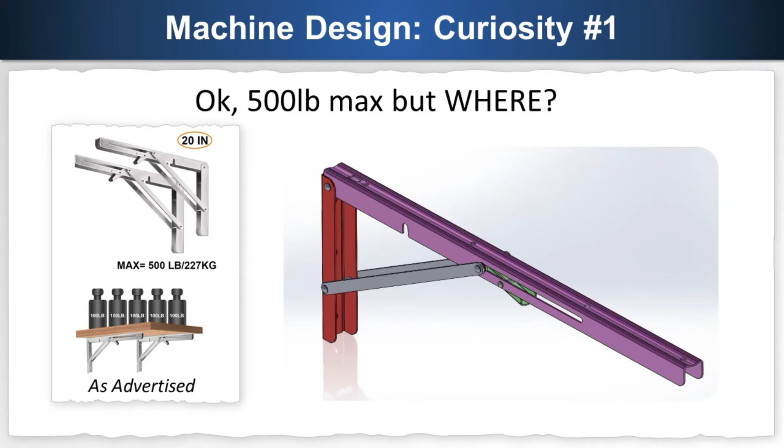Today in the Teardown channel, we are going to be analyzing a folding shelf bracket. Here are a couple of things to keep an eye out for. A loading of 500 pounds max, but where? How do I measure the torsional stiffness of the whole thing easily? What is the buckling force of the links such that they bow outwards?

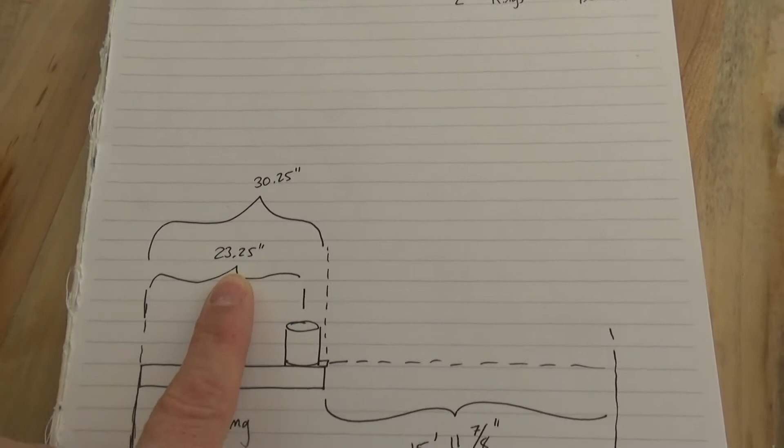There's a line here that's scribed to where we're going to load the center of the buckets. This tape is going to allow me to put another bucket on each side such that they're centered on the line. That is 23¼ inches away from the back over here. And then to the tip of the table is 30¼ inches.

With the laser mounted here, we're going to pan over and mark the 0, 0 location. So right now, it's going to go right there, and that is origin. And what we expect to happen is, as we put more weight, this point is going to go down due to Abbe error.

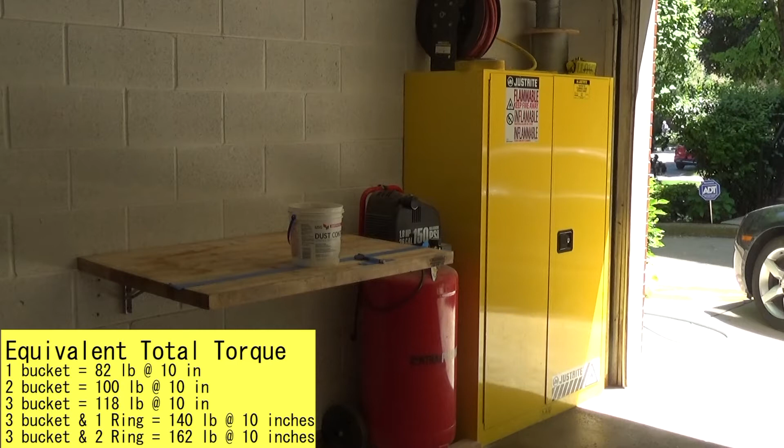Let's start. Data point 1. First, we're going to put one bucket right on the center of that location, and mark the point. 1 bucket. Now we're going to move on to 2 buckets. Make sure that the buckets don't apply a torsional load on the table. We're going to put them roughly at the center each.

Hold up. Am I missing something? Or did I hit the laser? I put the laser to the side, so we're going to have to start over again. Oh, no, it's there. It's aligned. So the laser just moved when the bucket's there. As long as it stays vertical, there's one way to determine: if I move this back out, does it go back to the original point? Yes, it does. So just be careful, don't move your sensor. It's a little bit off, about 1 millimeter to the side.

You'll see. So with 2 buckets, we're going to go here. Two buckets. Now we're going to do 3 buckets. Let's try to make sure not to touch the laser again. 1, 2. Third one. Come on. 3. So now we should have 3 buckets here.

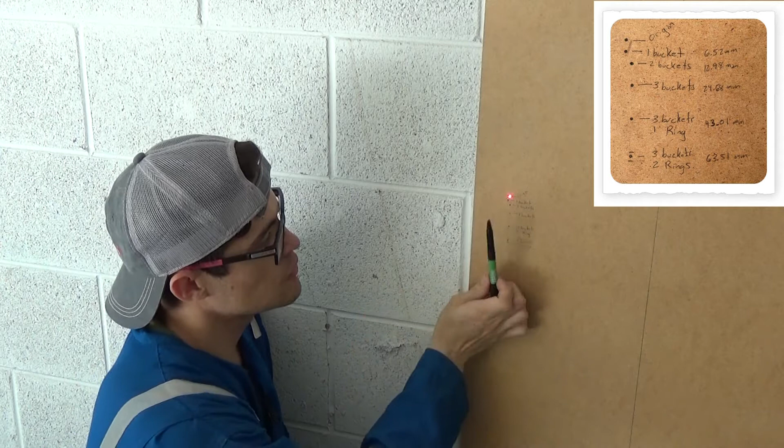Alright everyone, so we actually have done our loading, our experiment. The unit actually went back very close to the point of origin. There was a slight lateral shift, basically 1-2 millimeters sideways when we went from 1 bucket to 2 buckets, and it actually moved the laser a little bit, but everything looks like it's aligning well.

So what I've written here is the vertical displacement as we added 1 bucket, 2 buckets, 3 buckets, and then the rings as well. So as we loaded, that angle started to deflect.

And this, based on the distance, now we actually have what the Abbe error will be. And from that, we're going to try to back calculate what the actual parameters are for this configuration. Eventually, what we're going to try to get to is trying to reverse engineer the conditions that they are actually claiming this mechanism is rated for 500 pounds.

So we're going to weigh everything out, do the analysis, and then we're going to see how close it is, or under these conditions, how it's going to work. This is all about just having fun, reverse engineering in your garage, okay? So we're going to keep going.

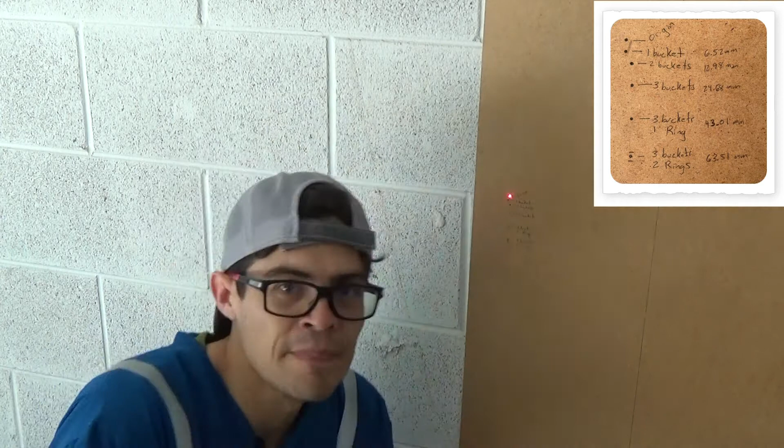So this is underneath right now. The table is completely unloaded. What I'm going to do is show you what the deflection is slowly. This is 1 bucket.

Now we're going to add slowly the 2 rings simultaneously, so it's going to be 1 bucket and 2 rings. Just look at the deflection that's taking place in these links.

And now I'm going to add the 2 additional buckets, so it's going to be 3 buckets and two rings simultaneously.

So let's get the analysis going. This is the total length that we have from the pivot location all the way down to the projection plane, the distance to our applied load, and our applied load in newtons. So using those values, I calculate a total torque, which is based from the load and from the static load of the table, the thing that doesn't change at all.

And then I use the displacement here to calculate what the rotation angle is about the pivot location. It calculates in radians because it's the arctangent of delta P over LT. And then I convert it into degree units.

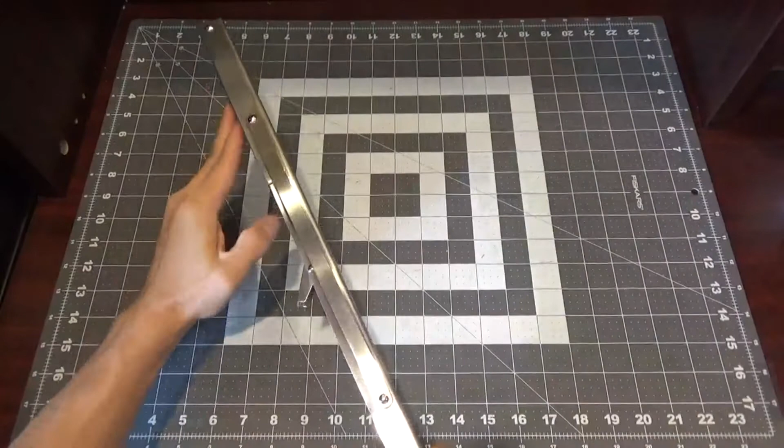Let's get started. Folding shelf, let's do the analysis, okay? This is so big, let's convert it into that little cute thing. And actually I like playing with Legos, and that's the only reason why I did it.

Simple. Alright, before we start, we're gonna go barbaric. I'm gonna set up our working digital table. Ta-da! How do you like this for digital? In the age of technology, I go paper and pencil. Okay, actually it's going to be more like markers than anything else.

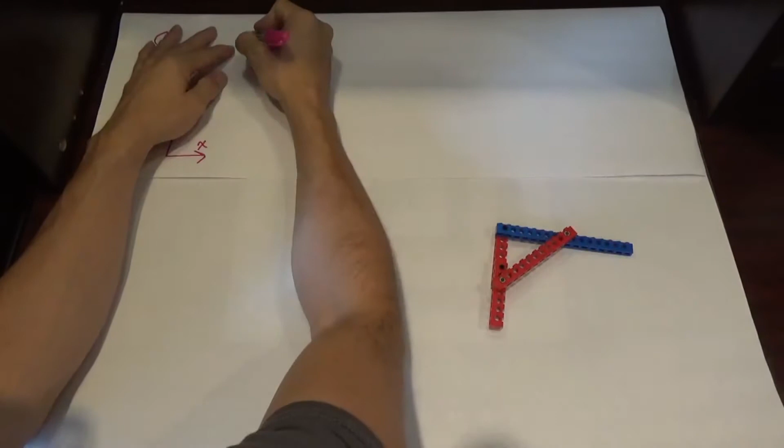Alright, on the serious note, one of the things we're going to try to do is help you set things up for any problem. So here's the method, and I put it on the little folding thing so we can do our problem here and keep our method in mind. Before you begin, you have to have a coordinate system. Do not go home or start a problem without a coordinate system, it just doesn't go well for you. Okay? And then the next thing we're going to do is label components. Okay?

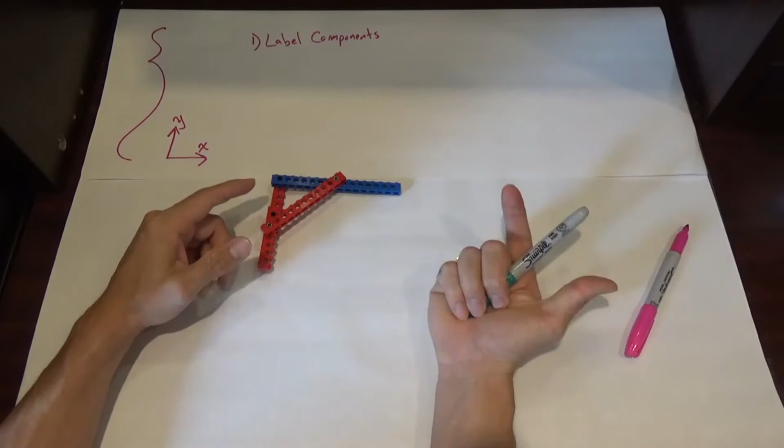I would love to just put everything here already, but I like playing the game: show me the rule for the next one, show me how to do it, and then keep going. Don't just give me everything and go for it. If you want to know what it is, first we're going to label the components: this part, this part, go to the points, do the sum of the forces in X, sum of the forces in Y, the sum of the moments by establishing equilibrium. But let's just go step by step instead.

Label components. Hey look, it does a really good job being a little support member. So where's the printout? Here's the printout. Ta-da! So this is the model. We're going to call this a bar and support.

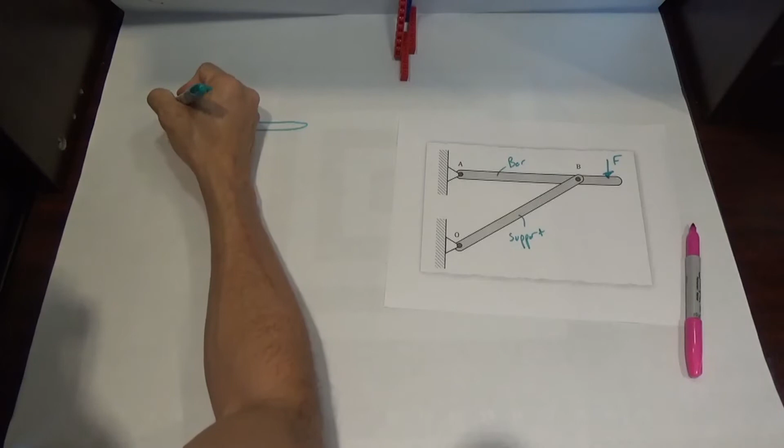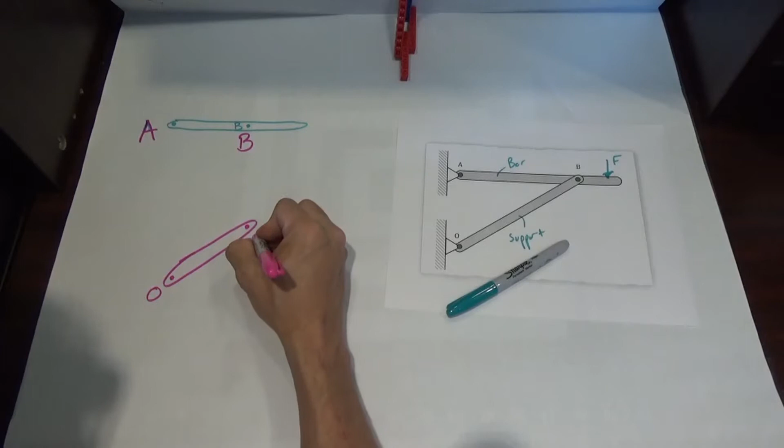Let's remember, there is a force somewhere along here. So let's start with the bar. The bar goes there, it has a point A, there's a point B. Let's use bigger letters: A and B. And then let's get this guy here, and this is O, and this is B. Okay, that's labeling components. Is it?

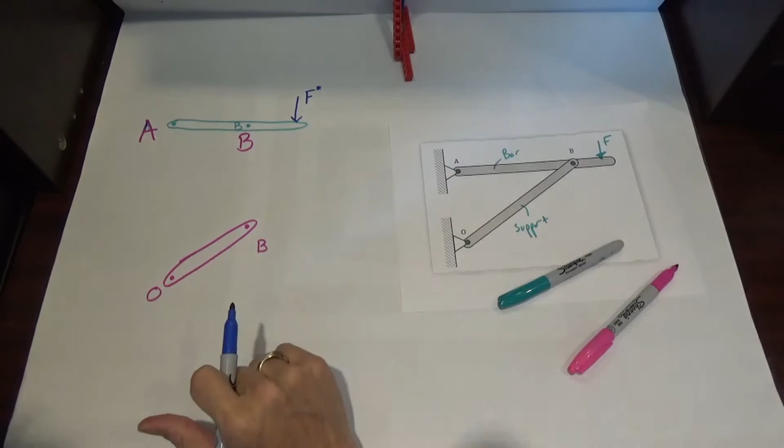Now let's put our forces in. So point two: forces. This is our applied forces as well as our reaction forces. So we're going to put a force F here, F star, and we're going to try to figure out how F star translates to a force on this support. So at point A, because that is a pin joint, we're going to have only force.

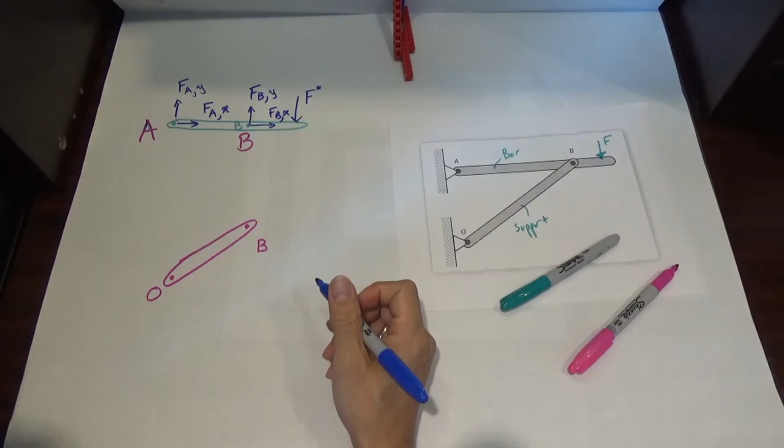Now here's a fun part. You can say, how did you pick the location of the forces? How do you know they're both in the positive X direction? Let's start with the coordinate, X, Y. How do I know that both of them are in the positive X direction? I don't know, this is actually just the method. The method will help you determine which direction is which from later on the math. Pick one, go with it, okay?

So let's go here. Because point B is joint there, it's equal and opposite, okay? So we're going to put another force here, equal and opposite: F, B, comma, X, equal and opposite, F, B, comma, Y. Now you can say, well, why are you putting it the other way at point O? Look, if it's new, I'm going to put it in as the positive direction, and then we're going to analyze them on their own. O, comma, X, F, O, comma, Y.

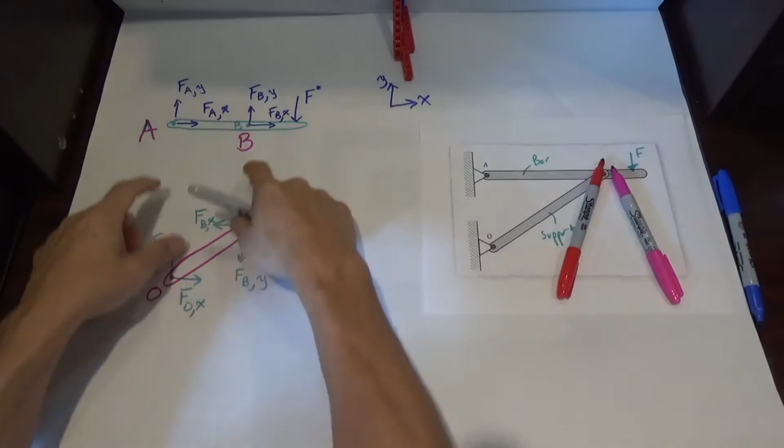Forces, applied force, great, next: sum of the forces in the X, sum of the forces in the Y, and the sum of the moments. So forces, now equilibrium.

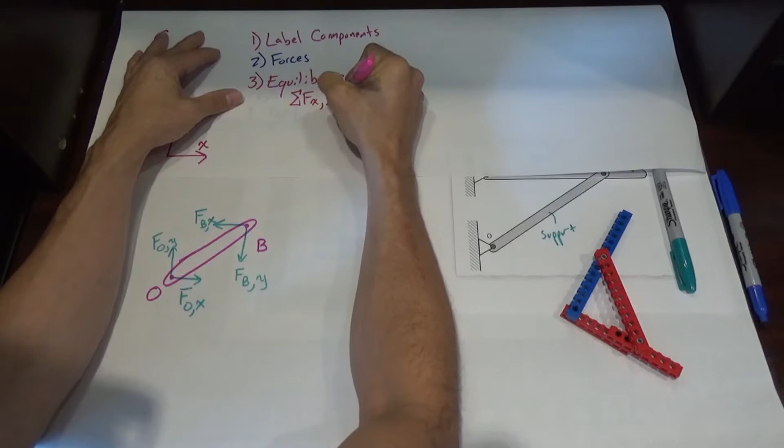And what does this mean? This means, if you see me humming or something, it's because I am actually listening to music while I do this. Why? Because that's the way that I usually work. I like music, and it helps me dance with the problem, to say the least.

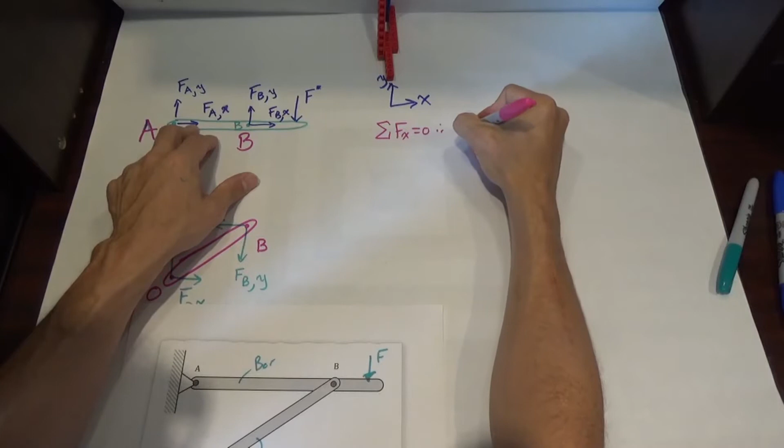So let's do this. How do I do this? Look, I have sum of the forces in the X. Let's do that: sum of the forces in the X for that equals 0. Therefore, F A comma X plus F B comma X must be equal to 0. What does that mean? F A comma X equals negative F B comma X, right? Done. When I get this, I box it.

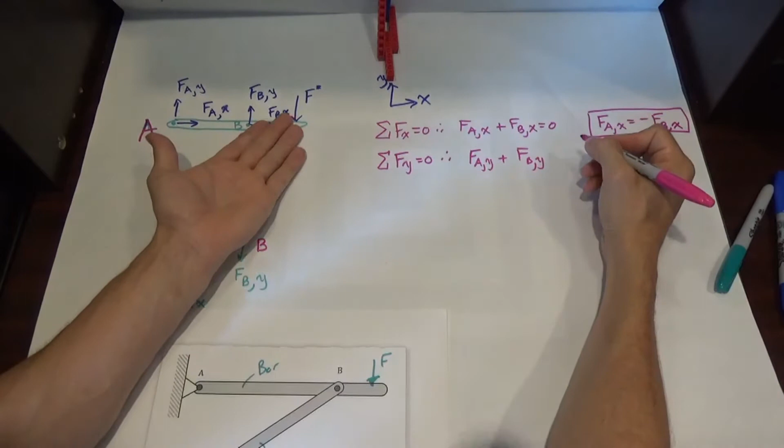Now let's go to the sum of the forces in the Y equals 0, because it's all equilibrium. Otherwise it would be F equals ma, because it's moving. In this case it's not. Look, we have three forces in the Y for this one: force A in the Y plus force B in the Y. Why did I put that F in the minus? I could have put it in the positive, doesn't matter, I can just put minus F star.

Equals 0. What do I really want to find out? In this case, eventually I want to just get a system of equations so I can find force B, and this force B is going to get back up here. So let's put F of A, Y. F of A comma Y has to be equal to, that's this force, F star minus F B comma Y. Okay, I can dance with that. Why am I doing all of this in letters versus numbers? Because this is going to help me do it for any system eventually.

All right, let's do it for another problem here. Eventually we'll do the sum of the moments. Let's put you up there. Yeah, let's just do it for here. Sum of the...

Forces in the x for you. What is that gonna equal? Zero. And in the x, we have this candidate here, minus FB comma x. Why? Because it's equal and opposite of that one, but that means this is in this direction. That makes it equal zero. So F0 comma x equals FB comma x.

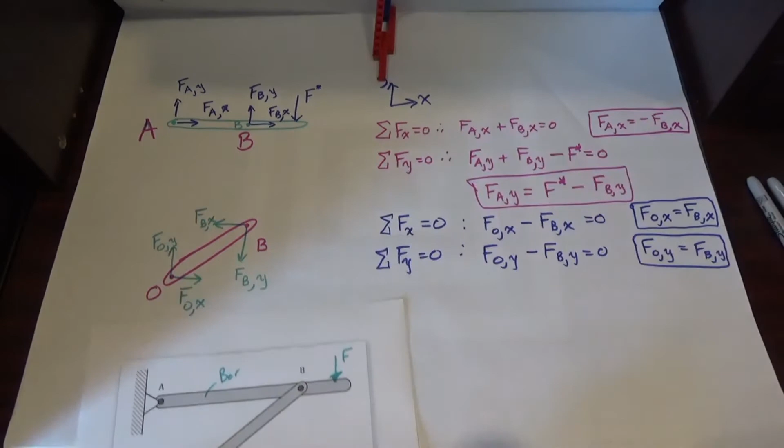Okay, so F0 on the y minus FB comma y. And I did this throughout college, I always used to put my finger, oh, you're next, oh, you're next. Okay, so what does this mean? F0 comma y equals FB comma y. By the way, this is one of the most useful pieces of advice that I will give you: keep your work really clean. If you don't keep your work clean, it is going to be a headache for you in the long term.

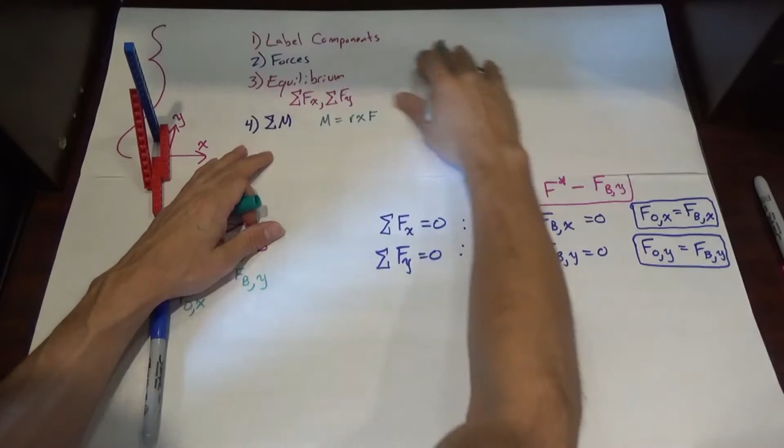Okay, we have equilibrium. Now we're going to go sum of your moments, which is part of equilibrium, but I wanted to put it into its own accord. So what is a moment? Moment is defined as R cross F. And as soon as I start writing this, it's going to be an abstract Vulcan language... let's just go and start, this is a mini lesson on moments.

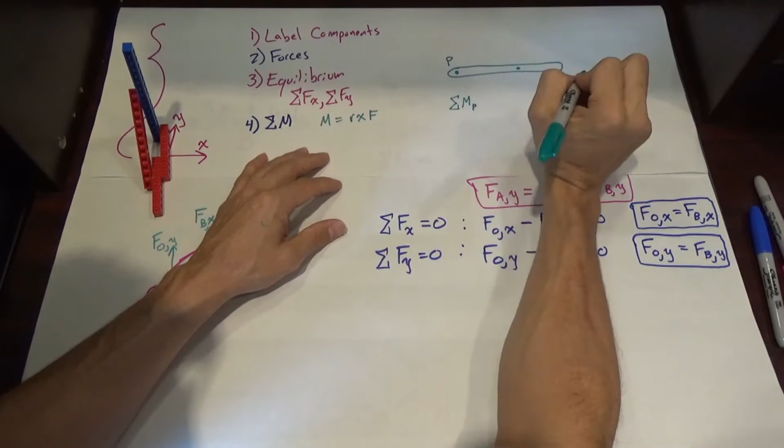And let's make this point P. If I take the sum of the moments for P, right? What is a moment? A moment, it needs a lever arm. Okay, so we're gonna call that L. And then a force. What's the force? That force could be, if it's that way, right? That's a force. So what's the moment?

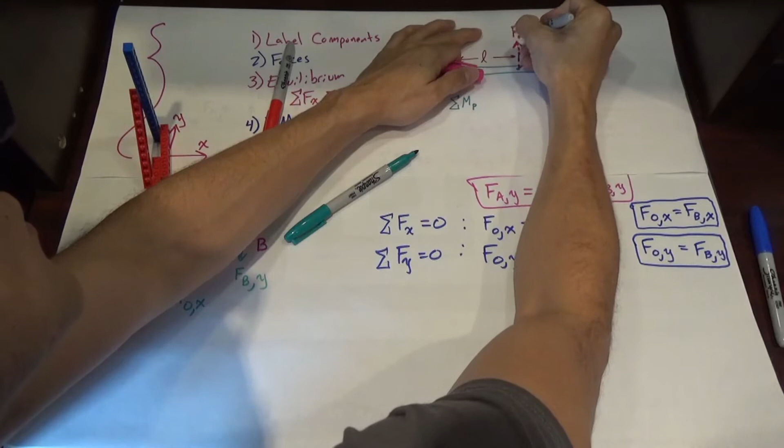This little cross product means give me the 90-degree component of it. So if it's this pink one, this force, that means 90 degrees is this one. So it's whatever this component that's 90 degrees, orthogonal. Okay? So whatever it is, then you locate it by the angle, and then that's what it goes. That's all that cross product goes into.

So in this case, the way that I've done it is I put all my forces in the x and in the y direction. Therefore, we'll figure out the angle stuff later. Let's start with the sum of the moments here. You see how F of B in the x direction is aligned, and F of BY in the y direction is 90 degrees. That saves us the hassle of the angle. And it's not really a hassle, it's actually really easy. So let's look at that one.

If I go and I pick the sum of the moments about A, then I have an entire system of BY and F causes a moment. If I go the sum of the moments about B, then that means FAY and F star causes a moment. So you just have to pick one. So I'm going to go the sum...

Of my moments. And then this is what we call the bar, right, of A has to be equal to 0. What does that mean? Okay, so that means I'm at this point, and because there's no lever arm, you go away and you go away. We have none of that.

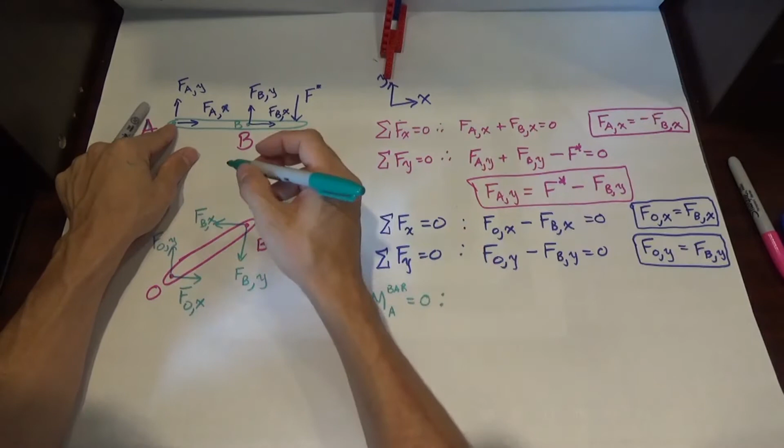Now, if I go here, because F of BY, there is no orthogonal component, that means, oh no, F of BX, sorry, there's no orthogonal component, that means that goes away. And now I need the length from here to here, LB, and then I need the length from there to there, and we're going to call that L star. I don't know if you can see that. Great, so length...

Dun, dun, dun, dun. That means we have something here, and now let's do the same thing, and we'll probably do it in a different color just to vary it up.

By the way, this reminds me of a story that I like using colors. Sometimes it's good, sometimes it's bad. I failed my qualifiers exam the first time because I got too enamored using colors and not enough focusing on the content. So what does that mean as a lesson? Hey, guess what? Focus on getting the job done right before you just start going and having fun. So let's get to this.

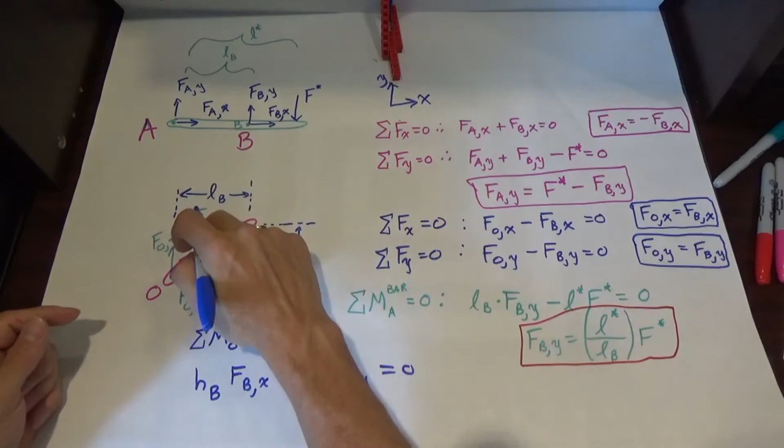So what does this mean? Now we're going to get the other one. Okay, I have a bunch of equations now, but check this out. Now I have an FBY, and then if I have this FBY, that means I have this FBX. I'm going to start getting them all into FBYs, and then get this out, and then, hey, this I can relate to that, and start breaking everything apart. Eventually, what I want to know is the forces FBX and FBY, or FOY and FOX. Why? Because this is going to give me the amount of compression or extension, right? In this case, I know it's definitely going to be compression of the support component that's going to cause it to buckle and distort.

FBX, F B comma X, that's going to equal to LB over HB. Great. Right? You move that to the other side, and this is going to be FB comma Y. Ta-da! Great. Now we have a challenge. And here's the challenge. I've run out of paper.

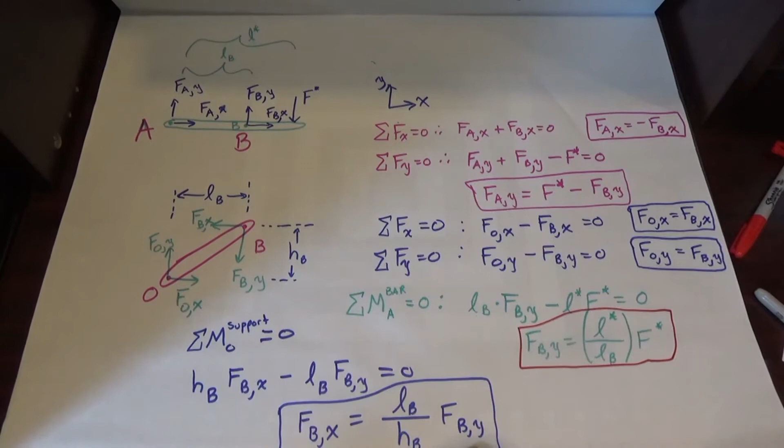Alright, so system of equations. I have 1, 2, 3, 4, 5, 6. And solve it. So what are we actually looking for? We're looking for this compression. If we're looking at this, I need to know FB of Y and FB of X. Hey, FB of Y is a function here, but I know that, and then that gives me in terms of L star and F star, and a known length. So this goes in here, and I can actually solve it based on these two. Now, why did I do the sum of the forces in the X and the sum of the forces in the Y? Because if I want to do the reaction forces here, which eventually you do, especially for more complex problems, you just get used to the method. Sum of the forces in the X, sum of the forces in the Y, equilibrium, which is there, sum of the moments, and then you'll get all the information that you need. If you want to do cheat sheets, or like if you're going on doing your qualifier exam, fine, you can jump up to here, but this comes only with experience, okay?

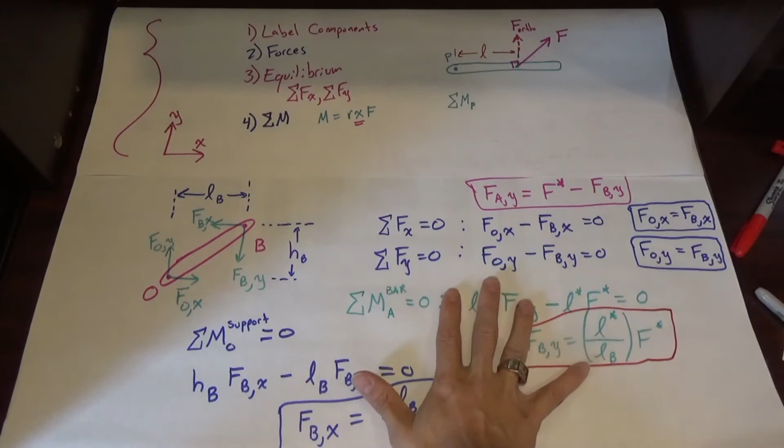And what I'm going to do is clean the board and go to the next one. So there's the 6 equations on top, and we're just going to do this section here. And I gave myself that spot up there just in case.

So if F of B in the Y equals L star, LB times F star, and then that means that goes in there, so F of B in the X has to be LB, HB, times L star over LB. Right, you're seeing why I put it here. LB HB times FBY, but FBY is here, so it's L star over LB times F star. Check this out. You go away, you go away. And now we're left with F, B, comma, X, equals nothing more than L star over HB times F star. Woohoo! What does this mean?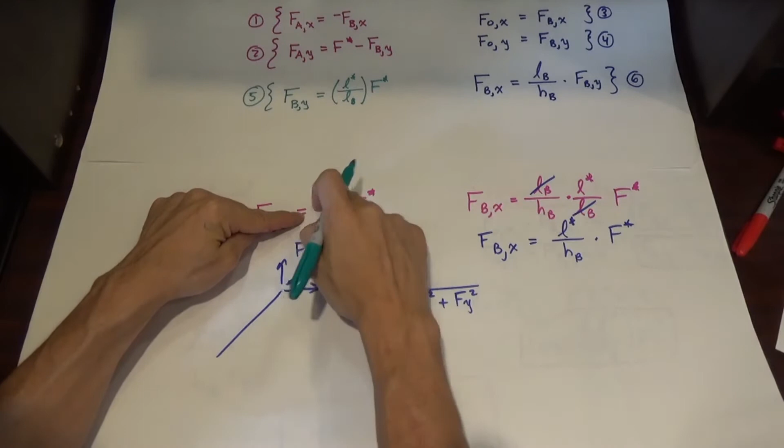So that means this is going to be F, and remember, this is the support, is going to be equal to... I'm going to move a little bit quickly on the math and bypass, I'm assuming you can do this too. It's going to be F star L star, because it's common to both of them, times the square root of 1 over LB squared plus 1 over HB squared, right?

Because if I put this inside and multiply, that means F star L squared, that's all there, and this is F star L squared, and that means that's all there. Wonderful. And this is what we're going to put into.

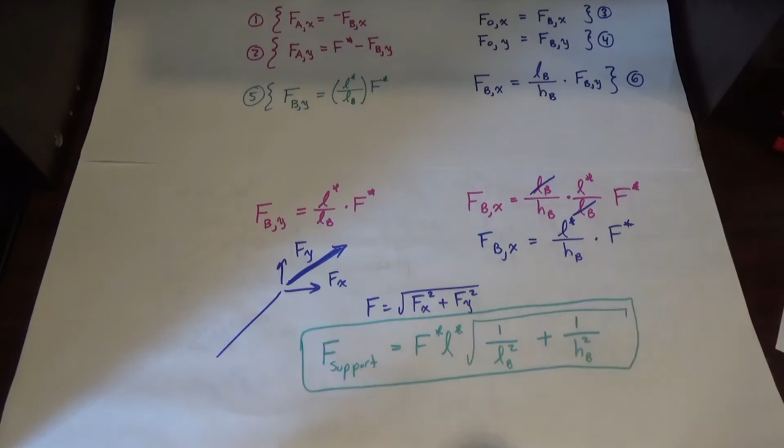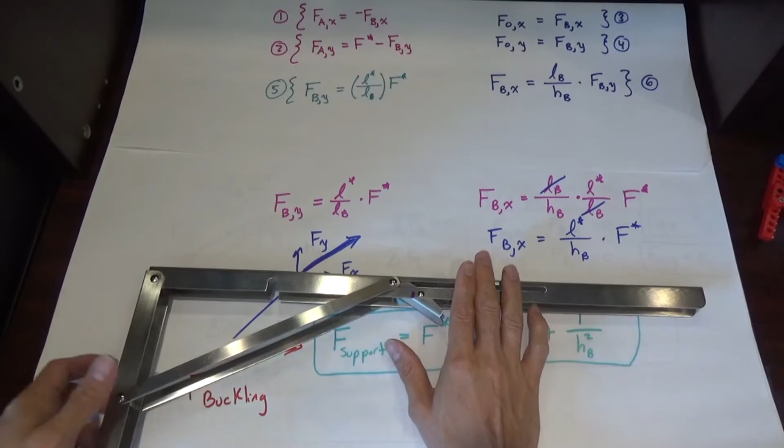Now, where is that going? That's going to go for Euler buckling. This force cannot exceed F buckling. So we're going to transfer this support force into a buckling force and see what is causing this component to essentially buckle outwards. In order to do that, we need to start a brand new sheet of paper and introduce everyone to Euler Buckling 101.

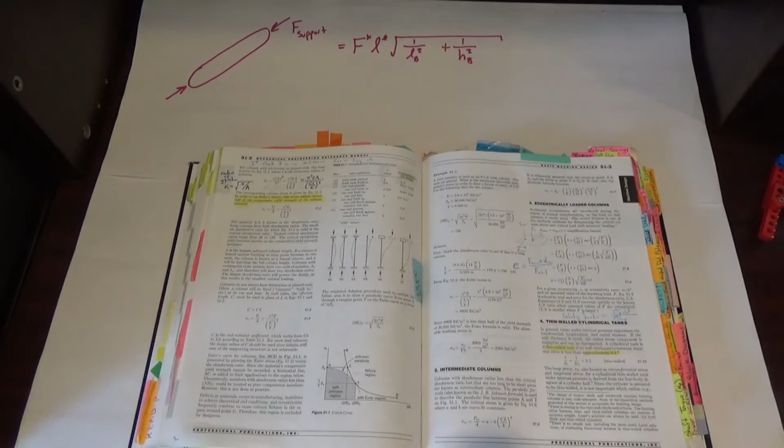Next slide. Ta-da! By the way, this is one of my favorite engineering reference guides. I use this for the PE exam in mechanical engineering. And let's get us here.

Euler Buckling 101. Here's an equation. These are different modes for the pin joints, for the built-in ends. So what I'm going to do is instead go over what the equations are and then actually just put it all in an Excel spreadsheet and look at the numbers.

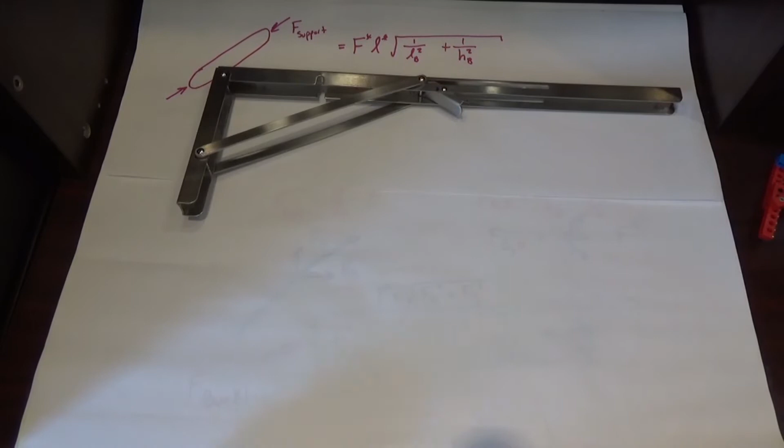Okay? So this unit is rated according to them. And let me zoom out, to 500 pounds, and that's both of them. So it was like, oh my gosh, when I did the test on it, I even put it, I was like, there is no way this can take 500 pounds. Absolutely no way. But my job as a geek was to say, Eddie, tell me the conditions in which this will take 500 pounds.

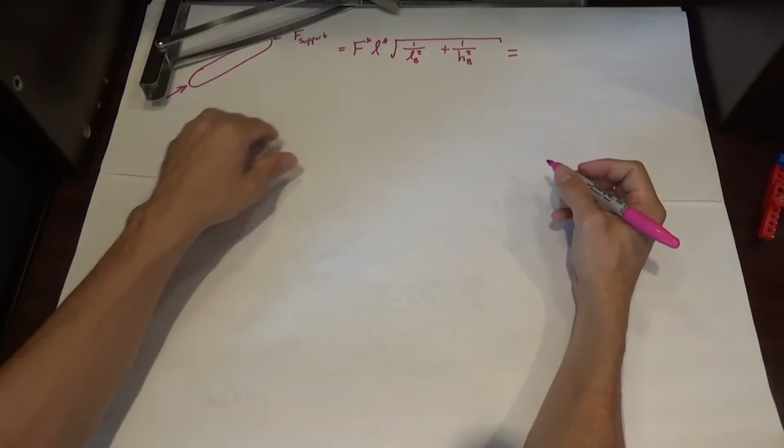So I started with this force of the support, right, and that's going and compressing, and I said, okay, let's do this. So if that's the support, what do I know from the other side? F support has to be equal to Euler buckling, and Euler buckling is just another equation.

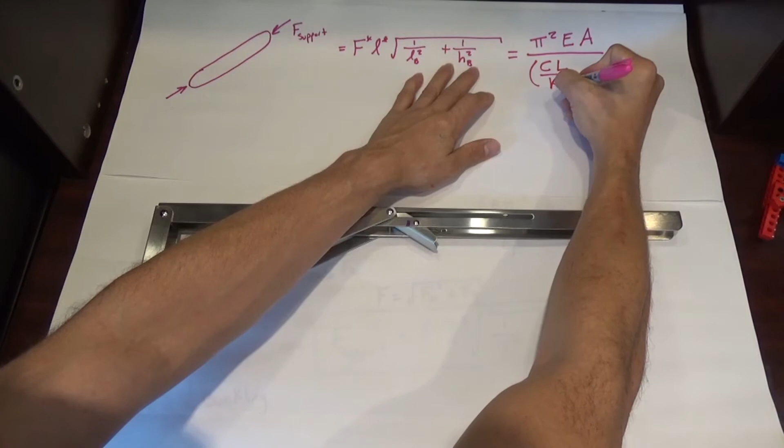E, which is part of the material properties, A, which is the cross-sectional area of that, and then it's divided by this funky looking number. And this funky looking number is CL divided by K gyration squared. So you can start going, oh my gosh, this is getting difficult. No, it's all just apples and oranges and just the same thing, just have to keep it.

So this K gyration is actually just a square root of I divided by A cross-sectional, and that's the same cross-sectional area here. And there's the Euler buckling, takes different forms. And this I equals just simply...

1/12 BH cubed. So, oh, that L here, this is L of length. So that L is the L of the length right here. The height is actually the thickness, so that height is the thickness of this component. That B is the width here. And anything else?

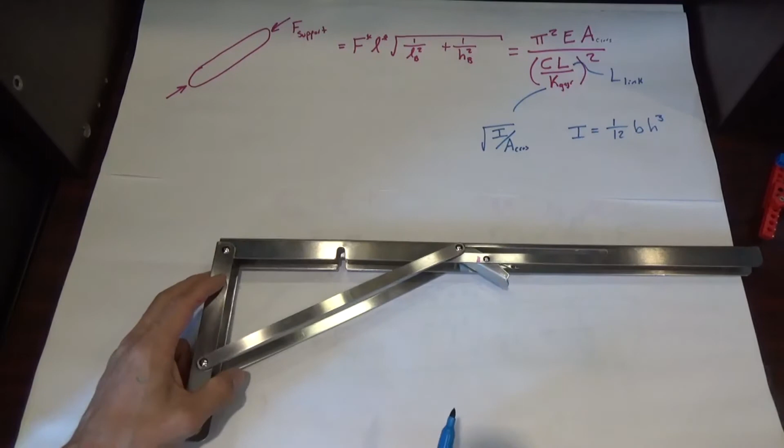No. Oh, that C factor. So that C factor comes in whether you are pin joints, which equals to C, let me go back to that reference, of 1, or...

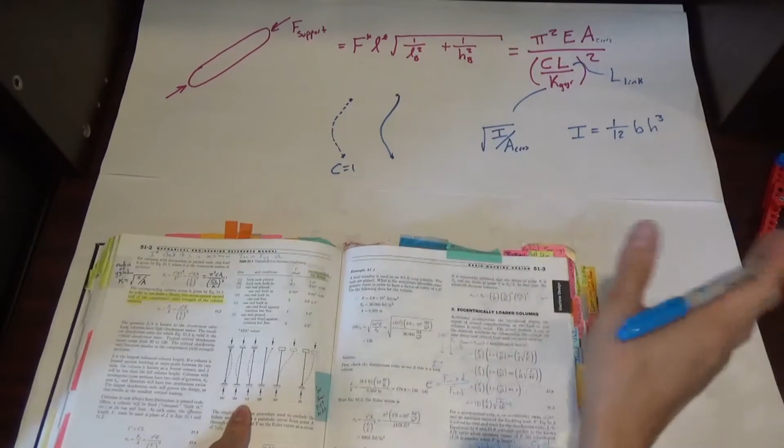Let me remove this guy out of the way. It's either 1 for this configuration, or in the other configuration where it's built in, and I actually believe that this is not built in for this system because of how it's actually deforming, and also because of the clearances, and this is C equals 0.65, but because that C goes in, there's going to be a factor of about 2.36, or actually we can round it up to 2.4.

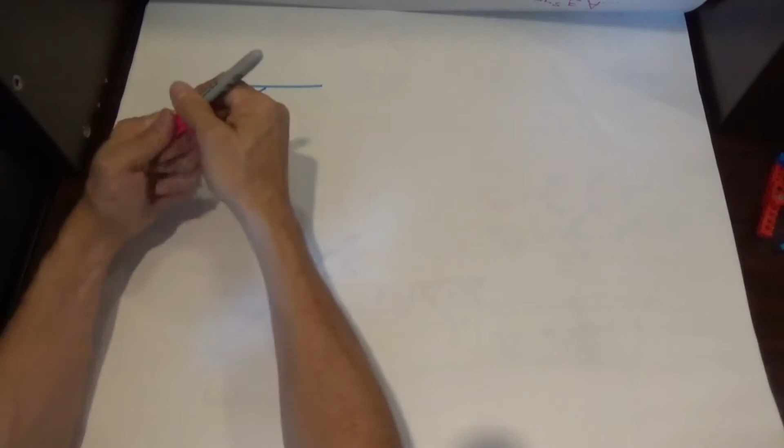Alright, so that's what the Euler buckling gives. So we can configure that equation to find this L. What is that L star? If you remember from the initial setup, L star was the location from the back where I apply my force, my critical force.

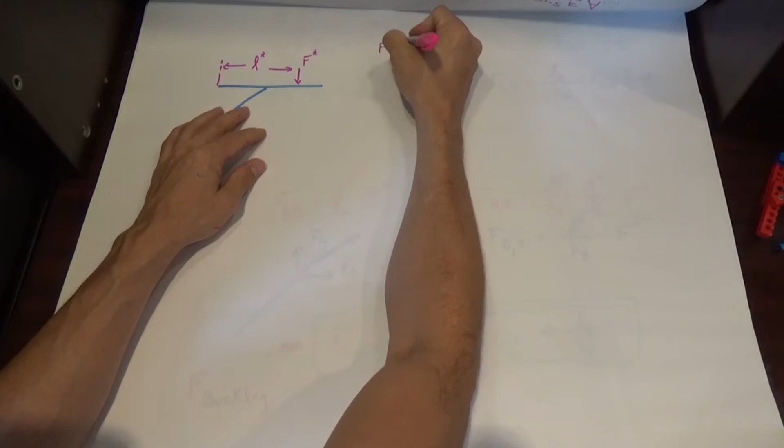To make sure everything is aligned, if I want to put that F star from the total load of the mechanism, that means I have 4 links total, 2 on each side, plus 2 units. This is where you get the math correct: divide that 500 pounds by 4, that's how much each link can take, and then do the analysis for it. That's F star.

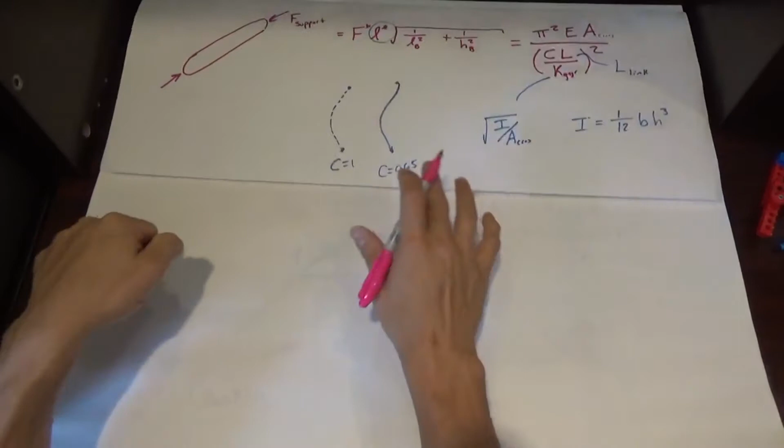Let's get back to this. Now we just reorient this equation and say, okay, L star is equal to pi squared E, the material property — you can assume this is stainless steel — times the cross-sectional area, which is the width times the thickness, divided by C, which equals 1, times L, which is the length from here to here, and because I noted the unit, I know that length.

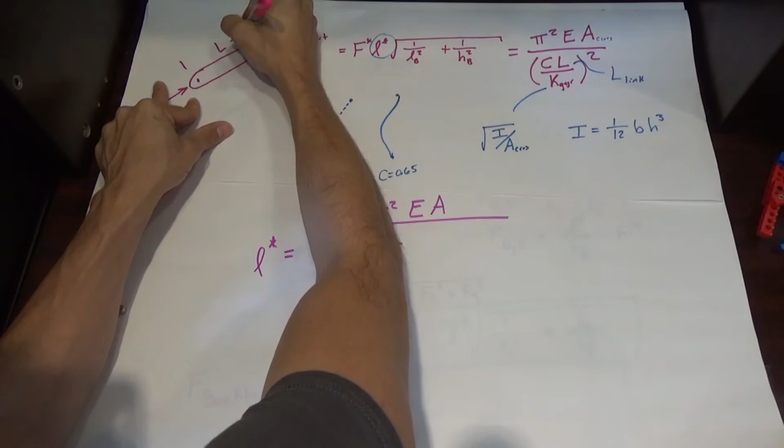Divided by the radius of gyration, square root of I, which is 1/12 b h cubed — we'll call that b h cubed — over 12 A again, which is the cross section. I don't expect to do this by hand; this is why we're going to use an Excel spreadsheet. I do it by hand just to see what the power factors are, okay? And then that goes to a square, that's a 2. Let's keep everything tidy.

If I want to make sure that's the F star total of 500 pounds, I put F star divided by n links, which is 4. That's the 500 pounds, but make sure to convert it all into the same units — if you stay in newtons, keep everything metric; if you stay in English units, keep everything in English units. Don't mix your different unit systems. Divide by 1 over LB squared plus 1 over HB squared. It's probable I may make a mistake on this, so I like to double check.

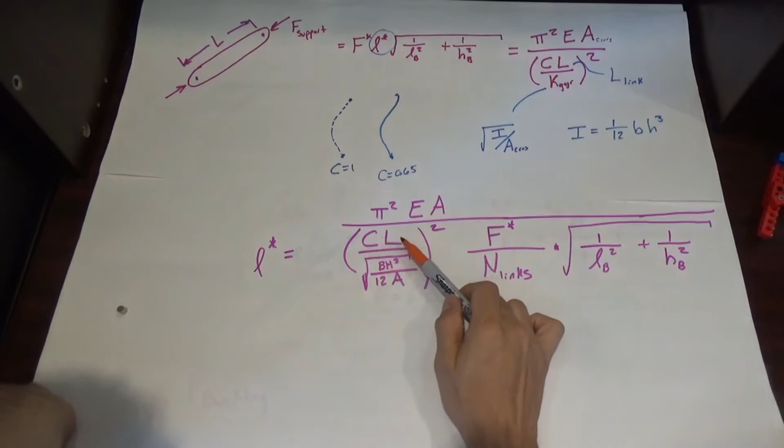E pi squared E A C L — did I convert this correctly? Cross-sectional area here, 1/12 B H cubed, check. All of that is squared. Now, because I'm dividing F, I adjust for the number of links, so that's in the total. And this parameter — now I went ahead and did that in Excel, and here's what the results were.

So if I assume a pinned joint, that means C equals 1. The buckling force per link, if I do the analysis, is roughly 374 newtons, and you can divide that by 4.45 to get your force in pounds. That means L critical, if I want to withstand 500 pounds, is just 2.56 inches away from the back. So here you go — on your mechanism, that's 2.56 inches. So fine, it can be rated for 500 pounds, but only 2.56 inches from the back.

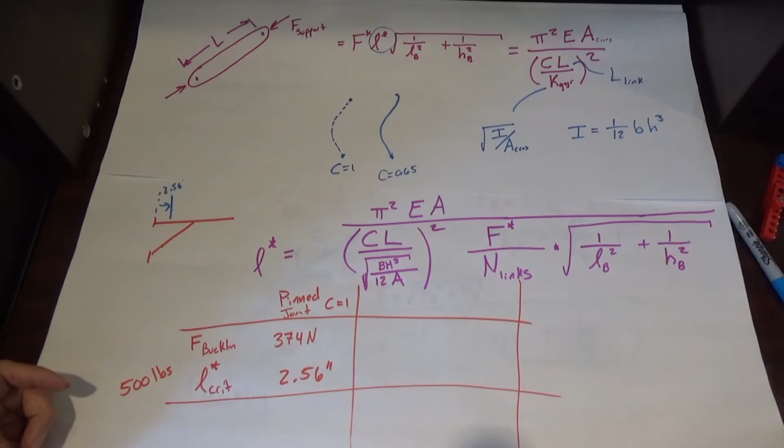That's your center of mass, and that includes everything: the weight of your machines, the weight of your microwave, everything — and the table as well.

Now, if I assume the other configuration, which is fixed, that means C equals 0.65, and this is the built-in case. That means this buckling force pushes up to 883 newtons, and I can have that L critical at 6 inches from the back.

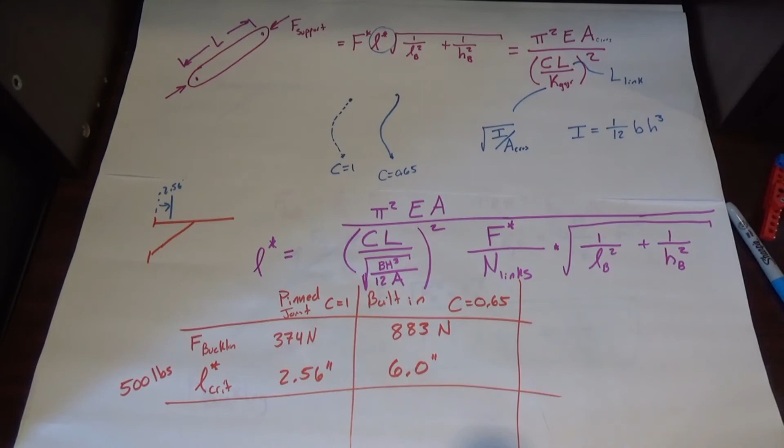That's cute, but actually, if I have this — let's turn this around — 2 inches, 2.5 inches is right here. I'm not putting all the weight out over there; this is a table, for God's sake. I'm going from here to here. So what if I were just to go 10 inches? I want to put my force, this is a 20-inch component, roughly at this mark, or this pin, which is about 10 inches. What does that look like?

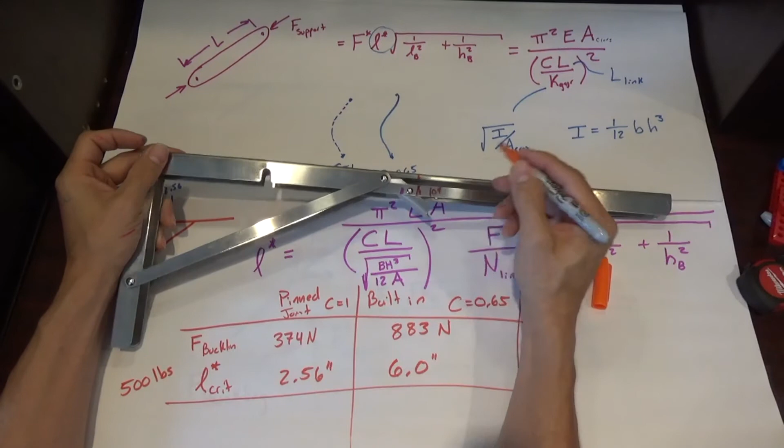This is where I got a little stuck, because I went with the pin joint and thought, okay, if my L star is 10 inches, the maximum weight I can have in this pin configuration is 128 pounds before it starts buckling.

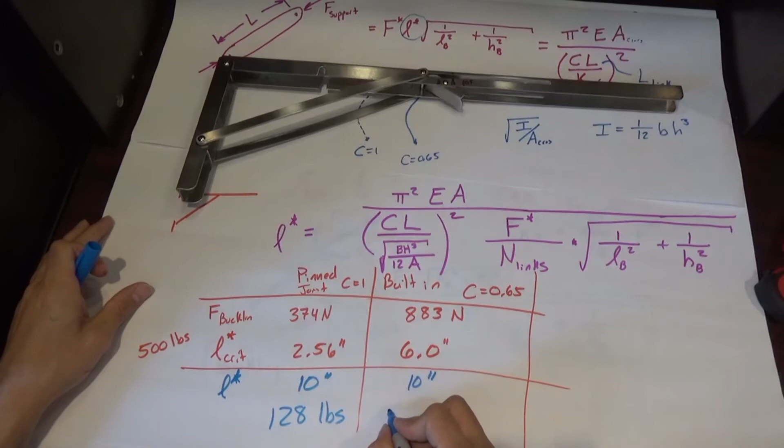Let me move back a little bit. And then if I make it to be 10 inches, and I assume that it's a built-in configuration, this is 300 pounds. So this is kind of weird, because they tell you that it's 500 pounds of force that this can take for the entire mechanism.

However, yeah, it can take 500 pounds if you load it up all the way back here, right? Or if you assume the configuration is such that you load it up about here, in the best case scenario.

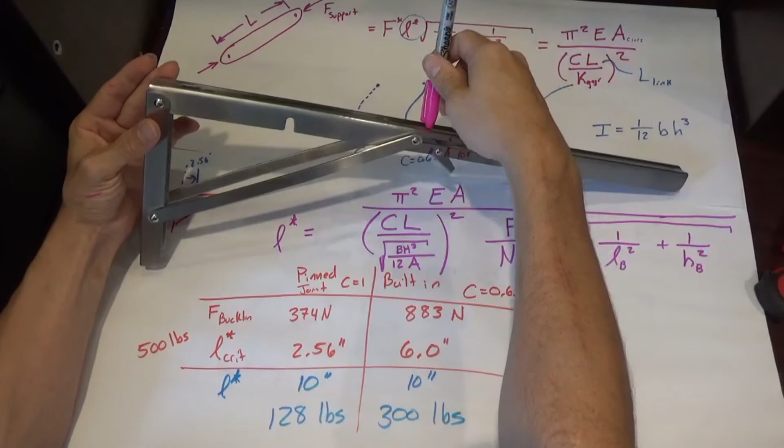The truth is, I'm going to load it up about here, about halfway, right? It's a 20-inch table. I'm not going to put all my weight back there. It's a microwave, or two microwaves, whatever it is. So it's a little bit misleading to believe that this can actually take 500 pounds in the regular user configuration.

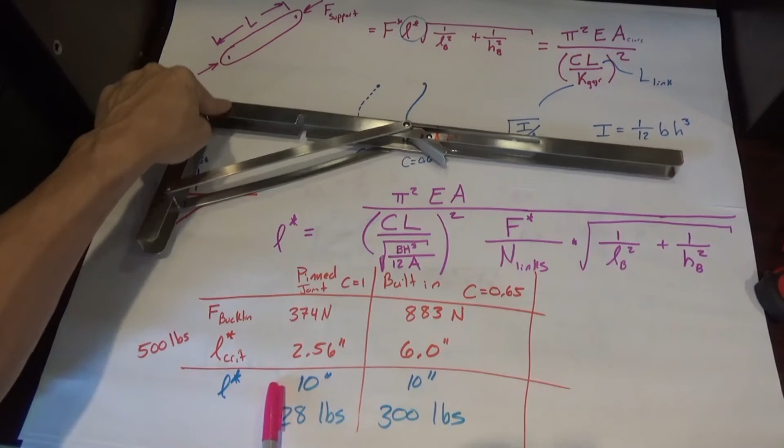And if you were to ask me, fine, it can take 500 pounds, but you have to put it all the way here. And the user most likely is not going to put it there. In my setup, when I have it downstairs, I was going to put it right about the middle. I wasn't going to put it all the way out there, but the weight was going to be about here.

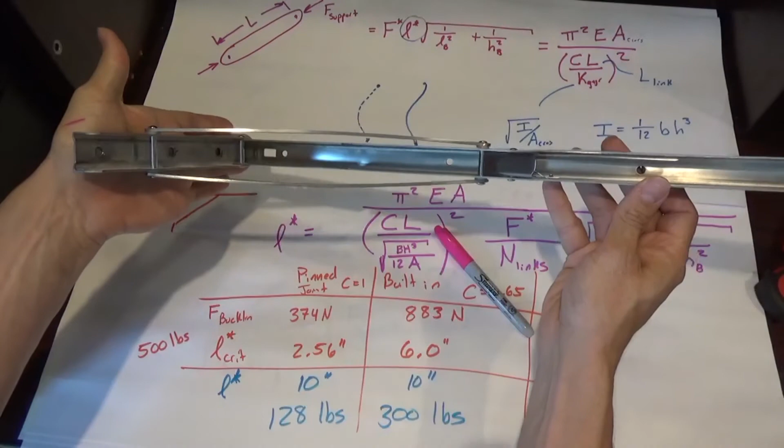By the time that I put my little bandsaw, my little table saw, and some loads on it, including the table, this is going to start buckling. And that's actually what's happened - these components are starting to buckle. I don't feel comfortable using them, because you can see what the difference is. You'll see them downstairs later in the video, showing what's happened.

As they start and you put a load, they start separating. And what I fear is that there's going to be a prying action on this component, on the pin, and then the pin's going to fall out, and then the whole table's going to fall down because there's not going to be any support. The pin's going to go away.

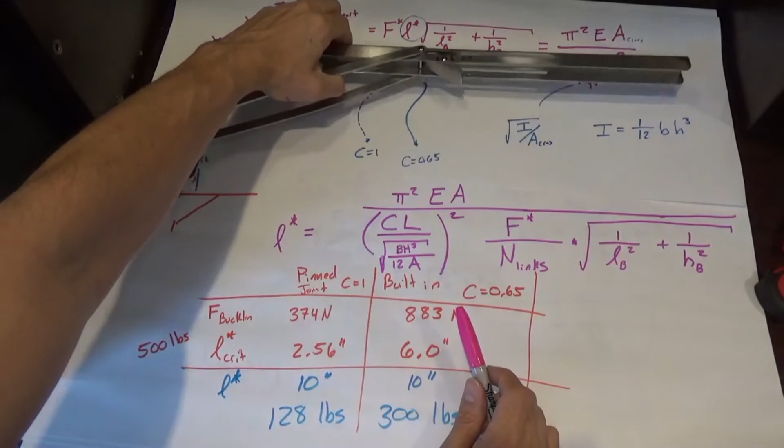So here's the analysis and the numbers. I put all of this stuff in an Excel spreadsheet, so you can go ahead and find out the numbers yourself. If you find anything wrong in the Excel, by all means, please let me know. But this is - fine, it can take 500 pounds, but the buckling force will actually kick in after 2.5 inches from the back, and after that it's going to start plastically deforming, leading to a failure in the system.

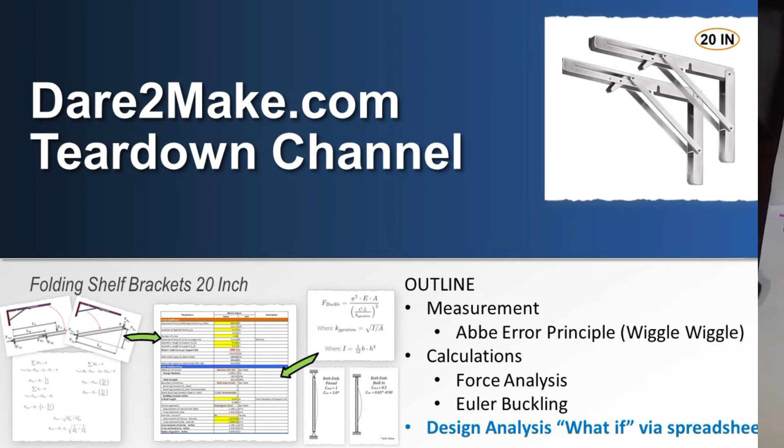This is the Excel spreadsheet that I created, and look, at first glance I know it looks overwhelming, but let's just dive in little by little.

So this is the geometry that we used in order to actually do the force equilibrium, and we use those variables here to calculate the axial force per link. This is the geometry of the actual folding shelf bracket.

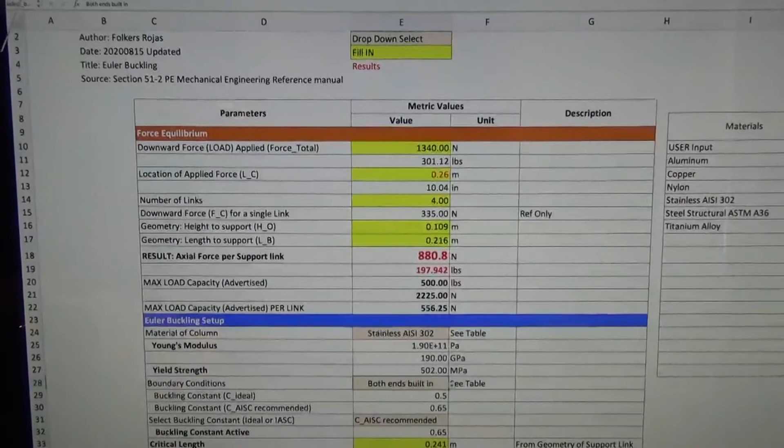So let's start jumping into the actual table. I go first and look at, okay, what, as a user, am I going to put as an applied force here first? So what is that applied force? Okay, so it's about 300 pounds. And I write everything in newtons and then I convert it to pounds for other people's reference.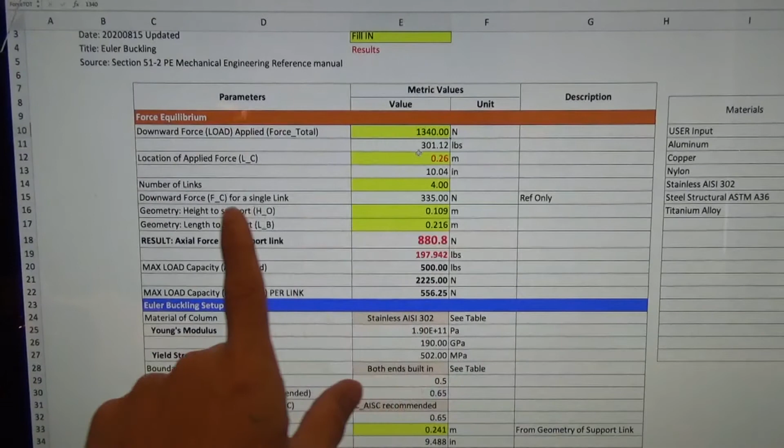I try to work everything in metric. And then the location of that applied force, roughly 10 inches from the back. Number of links: 4. This is the downward force per link. And you can go through it - what I did is I put the axial force per support link, and that is based on this applied force.

Now if I were to just look at the analysis and say what's the maximum load that this is rated at, and then give me the critical length, we're going to use that in a bit.

After I have my loading requirements, then I actually go into do just an independent buckling analysis. What's my material? I can change my material from aluminum to stainless. I'm just going to go stainless.

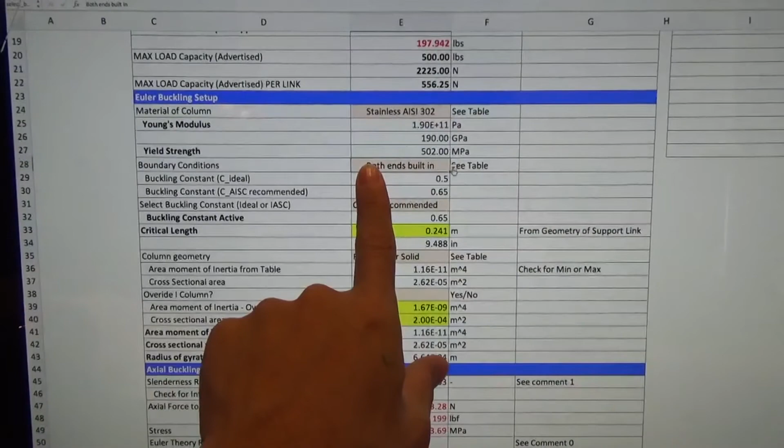That brings me all of these parameters. This is just using my properties tables. If I want to go and change my built-in configuration, both ends pinned, it changes my constants for buckling. Or if I want to go from recommended to the ideal parameters as well.

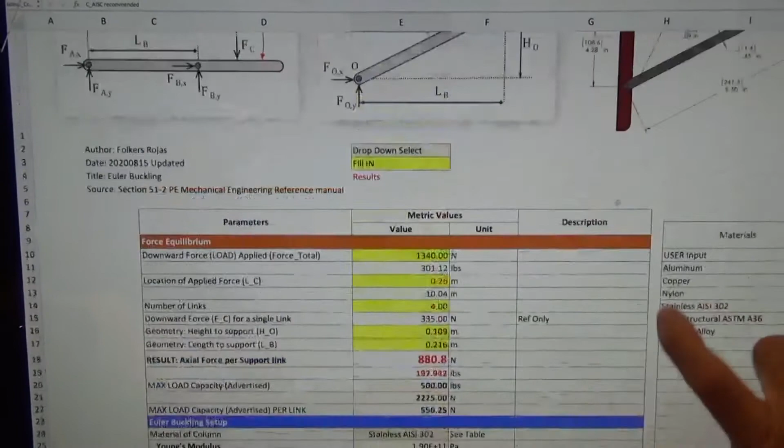So I go there, and this tells me which buckling constant is the one that's active. The critical length of the buckling is actually this length right here, the length of that link, which I set based on the CAD measurements.

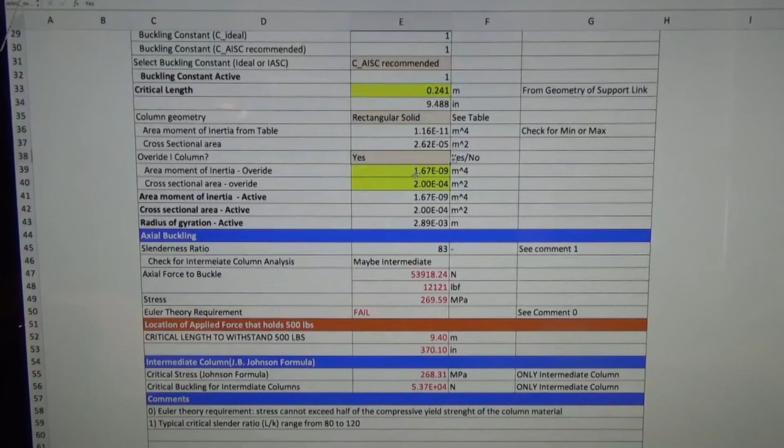Column geometry, this is what references that other table to the right. And then that goes into rectangular solid, and this will pull the area moment of inertia and the cross-sectional area. If I want to override it, then I just go click yes here, and it's going to override it to these two parameters in yellow. So if it is in yellow, that means that's where I put values in. If it is in white, just leave it alone. If it is in this peach color, that means it's a drop down. And then this will actually tell me which parameters are active.

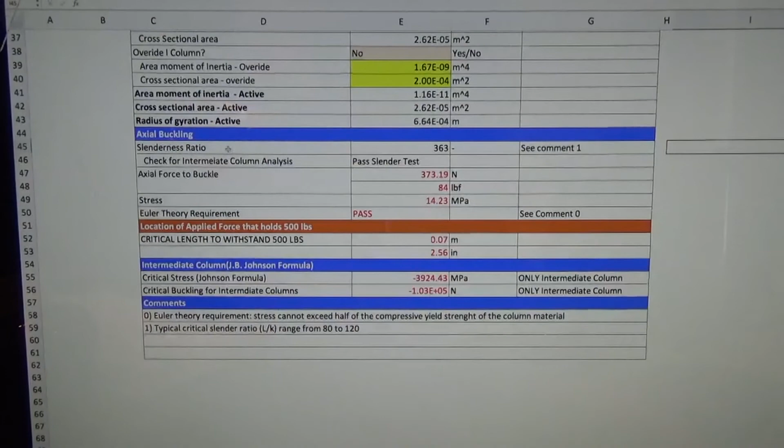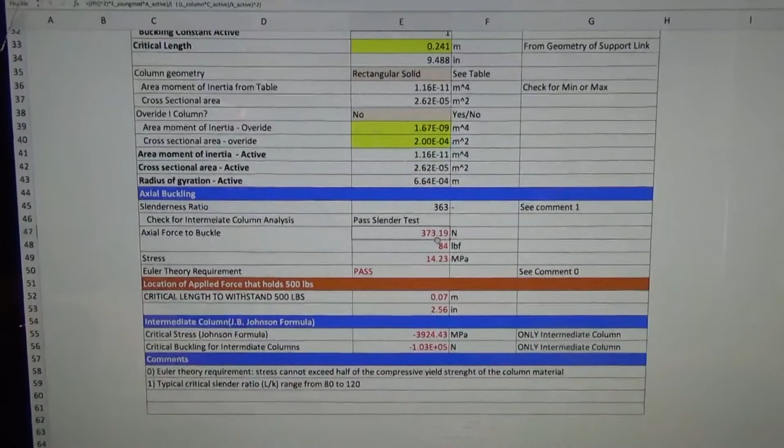And I go and I do the slenderness ratio test, and then you can go and read about it a little bit more. I put comments here, and then I also put the axial force to buckle, and that's what this value is. So if I have it in the existing geometry, both ends pinned, stainless steel, the axial force to buckle that component is 373 newtons, and it calculates the stress as well.

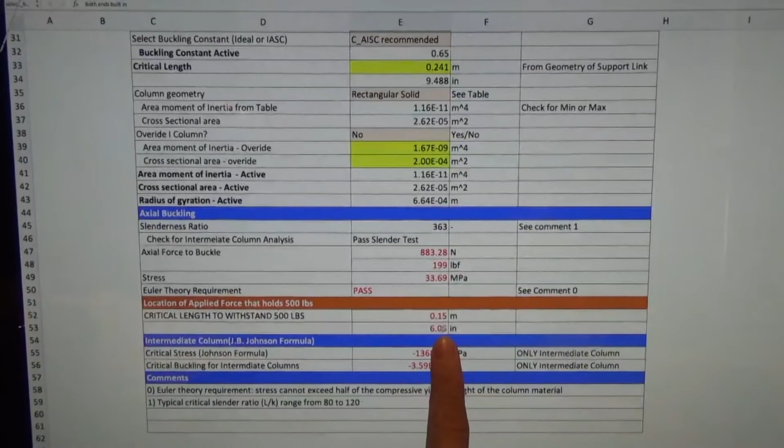Now, if I want to actually go and say, if I have 500 pounds, where will those 500 pounds be in order for this not to buckle? And this is 2.5 inches from the back, 2.6 inches from the back, and that is if both ends are pinned. Now, if both ends are built in, it's 6 inches from the back that I have to be within your center of mass, and that includes the table as well as any component that you're putting on top, and that's the max.

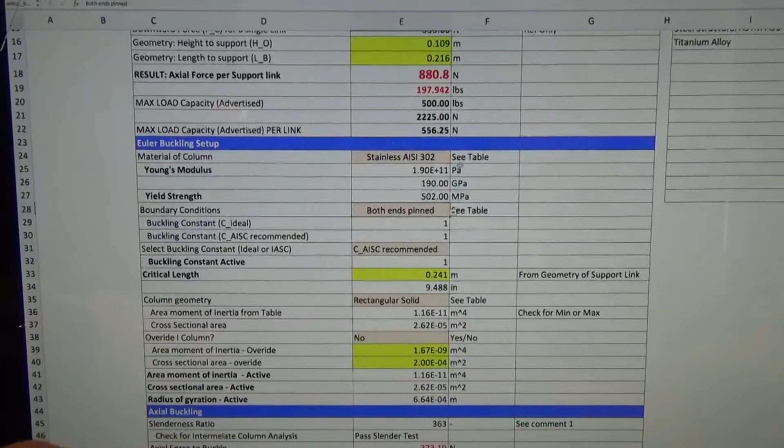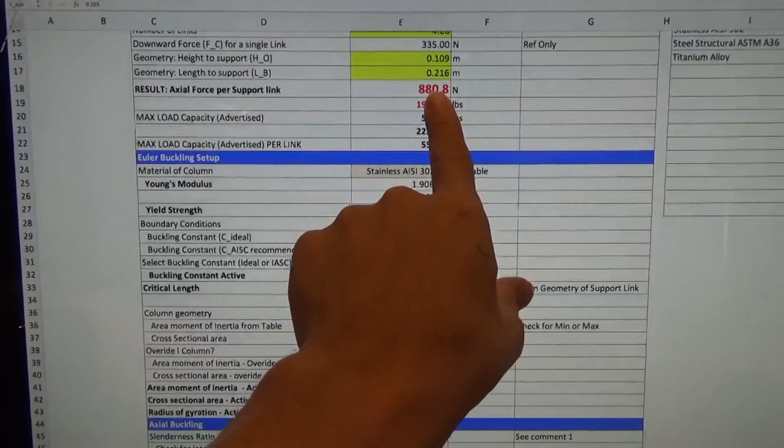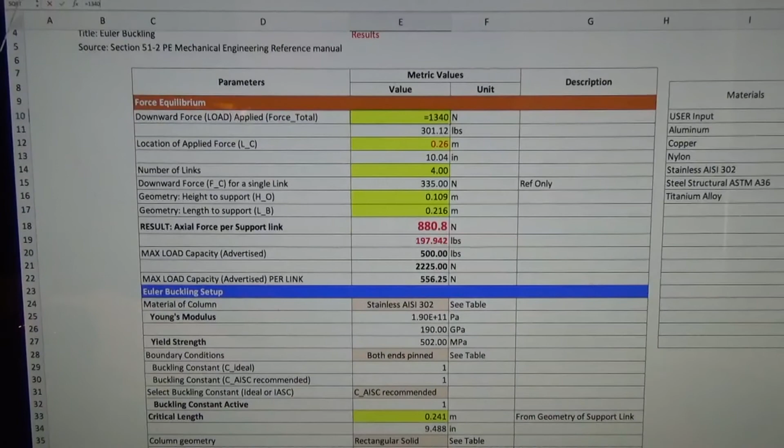Is it going to buckle? And so you compare this axial force, the 880 newtons, to this force, which is 373 newtons, and that means that the axial force to buckle is exceeded, and this is going to break. So the other option is, let's say you divide this, equals, divided by 3. So now I have 100 pounds.

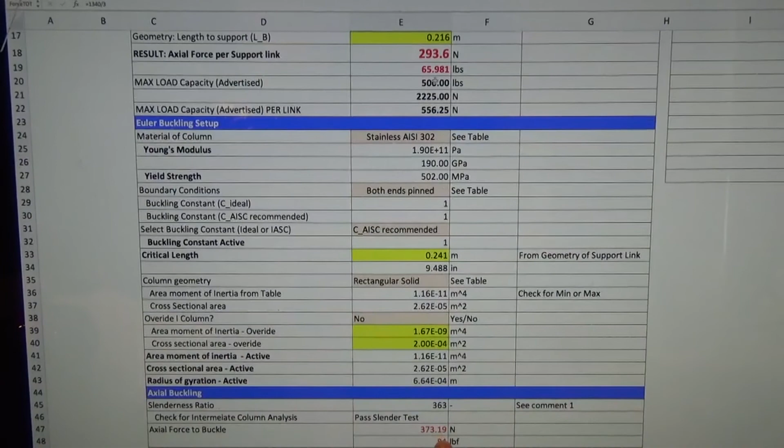At 100 pounds, that means that's 293 axial force on the link, and my buckling is 373 because it hasn't changed. So that is almost, what, 80 newtons off? Yeah, 80 newtons off from buckling. So I can withstand about 100 pounds total, and that includes table and everything, about 10 inches away. And that's what I would actually be comfortable loading this unit at, about 100 pounds total without those links buckling.

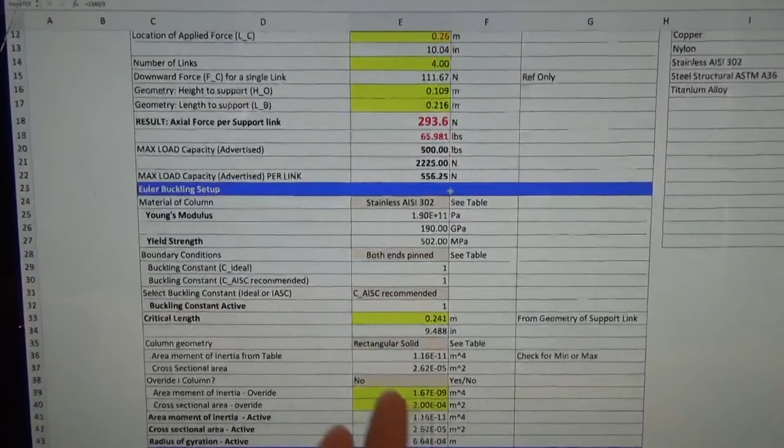However, if you have eccentric loads, this doesn't take this into account, and that actually adds an additional complexity to the system. How about those 500 pounds, huh? It's 500 pounds only if it's loaded about 2.5 inches from here. As a user, I'm actually going to be loading it up about 10 inches from here, so it's not really 500 pounds, it's much less. And what you saw as well is that even under 100 pounds, these are starting to spread out and buckle.

There's a couple of fixes to it. That is changing the geometry of these links, and remember that it goes like the thickness cubed. So that's one way. The other way is, hey, I have to use this, so what do I have to do in order to actually make it feel safer, at least for me? And I'm applying engineering reciprocity. So flip it 180 degrees.

Bloop. What's the difference? The difference is that under this condition, these links are in compression, hence Euler buckling. However, when I flip it 180 degrees, these links are in tension, which is a whole different failure mode. Just by flipping it 180 degrees, this mechanism now has its own different failure mode characteristics, based on tension of these elements and the strength of the links, as well as the back support being able to withstand the moment applied by the load.